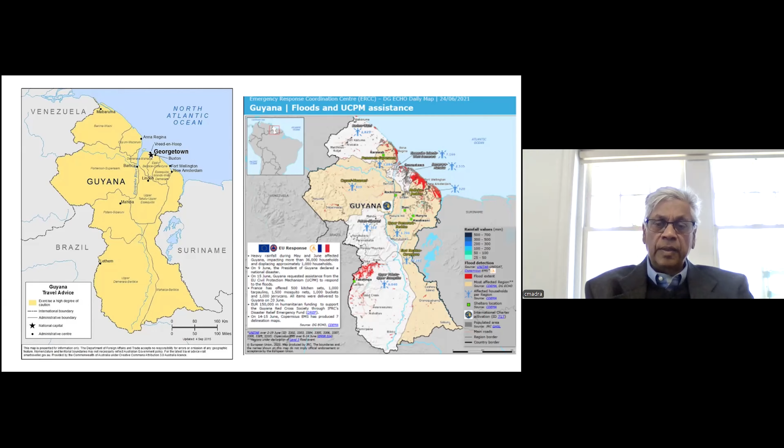So although Guyana is a fairly large landmass, most of the population lies along that coastal area, and this is why the project is also focused in Guyana.

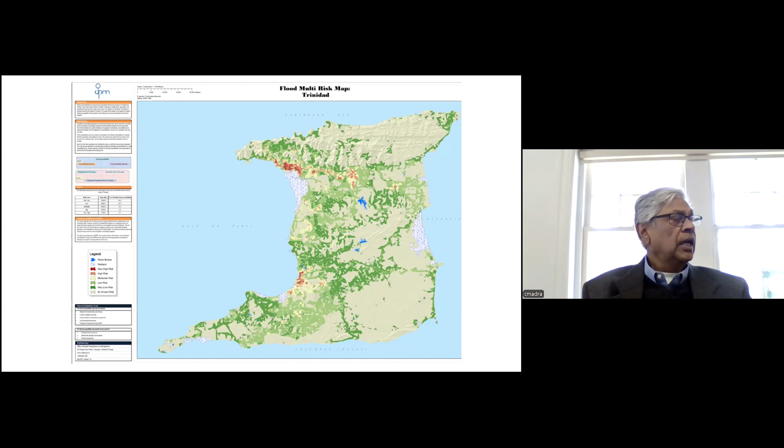So there are many countries - I don't want to go through all of them, but there are something like 12, 13 countries in the Caribbean region affected by flooding in one way or another. The impacts of sea level rise as a result of climate change have exacerbated the problems of flooding.

That's why it's not uncommon to see flooding in the city of Georgetown, capital of Guyana, in the commercial districts and large residential areas, which disrupts economic activity, disrupts schooling, and also affects hospitals and markets, causing food insecurity, water safety problems, and waterborne diseases. There are all these outbreaks associated with flooding that make it important to develop techniques and a framework to deal with flood control.

So very briefly, that Caribbean 360-degree report had several findings.

One of the principal findings is that Caribbean countries are not prepared for the new challenges posed by climate change, compounded by the uncertainty of the future of tourism markets and a lack of fiscal space. They've identified that increasing government efficiency would be required to improve investments, management, and infrastructure in emergency situations. We need to empower households and the private sector to increase fiscal space, strengthen skills for resilience, improve access to finance, facilitate access to risk information, and reduce future physical risk as a result of flooding.

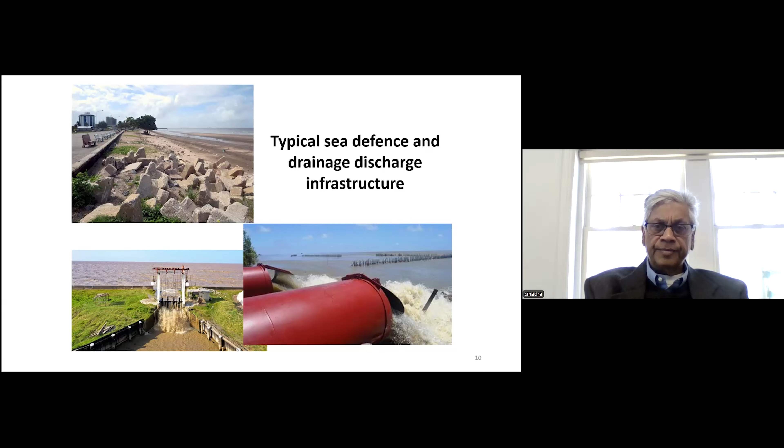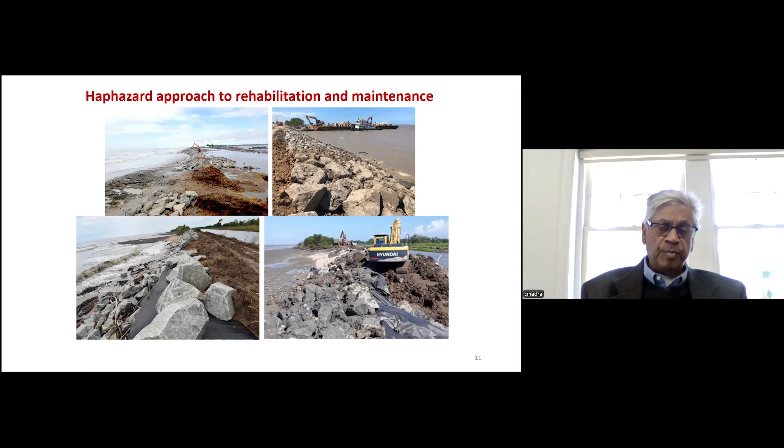Currently there is a haphazard approach to rehabilitation and maintenance. It's very reactive: after floods have occurred, government comes in and starts to repair the retaining walls, do patchwork, build in better berms and boulders for riprap, but it's always reactive. None of this is being done proactively. There's no recognized scheme in place to deal with floods proactively, and this exacerbates the flooding in the country.

So the goal of this project, which was part of the call from the New Frontiers in Research Fund, is that it must be a co-designed, adaptive, co-management solution to the problem. This is not something where international agencies just come in and develop a solution without getting input from the flood-affected communities.

So we developed this framework which shows how we can work with the communities, and I'll talk more about this later. This is some work that Professor Adamowski and Cody, our graduate student, are working on, looking at bringing communities in to help develop some of these strategies.

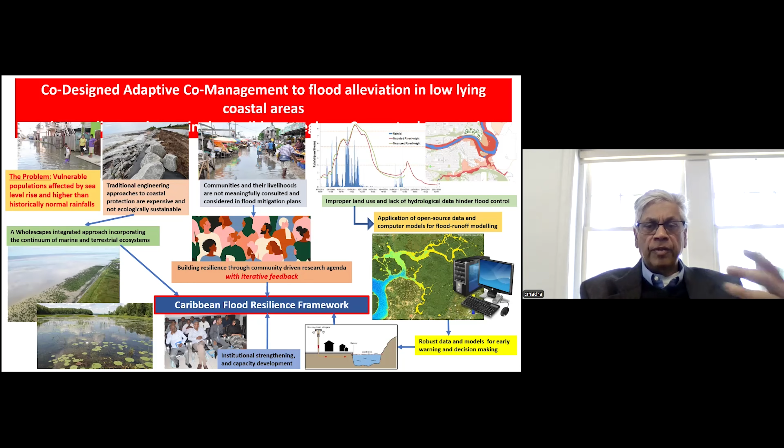And then how we can build capacity through better hydrologic data and flood mapping, using computer models and nature-based solutions, to build resilience through a community-driven research agenda with iterative feedback. So one of the things we're doing is getting feedback from the communities, and we're using that as we go further with our objectives for the project.

So the major deliverables or outputs are this co-developed risk, hazard, and response model to serve affected communities, including the provision of communication products that the communities can take up.

We want to build capacity in the communities, government agencies, and local universities. We also want to improve government policies and institutional frameworks for flood disaster risk management. So these are the three broad objectives, but there are many sub-objectives under these.

Some of the methodologies we are employing are flood forecast modeling, satellite monitoring of rainfall, watershed modeling, using very elaborate models that are suited to very flat, low-lying areas. It's very difficult to model, and I'll talk a bit more about that.

We're looking at coastal dynamics and tidal modeling for the operation of sluices based on predictions, as well as rainfall forecasting, and doing real-time water level measurements and data collection tools as part of our citizen science program. How do we empower citizens in flood-affected communities to help collect data?

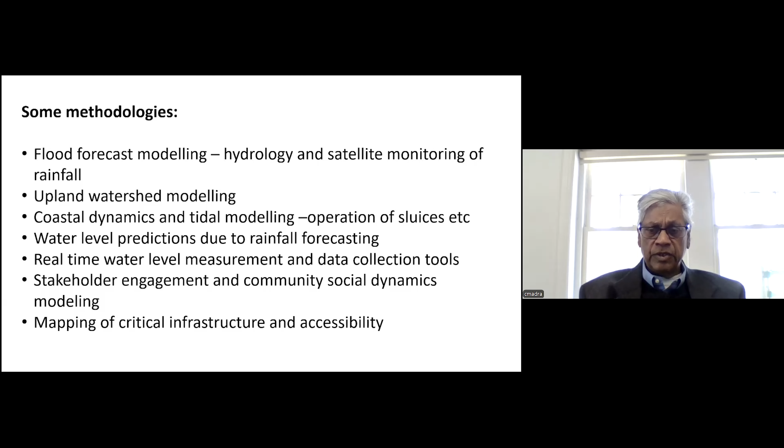We're also looking at mapping critical infrastructure, accessibility, and how to build resilience to prevent that infrastructure from collapsing during times of floods. So we have about 8 tasks overall.

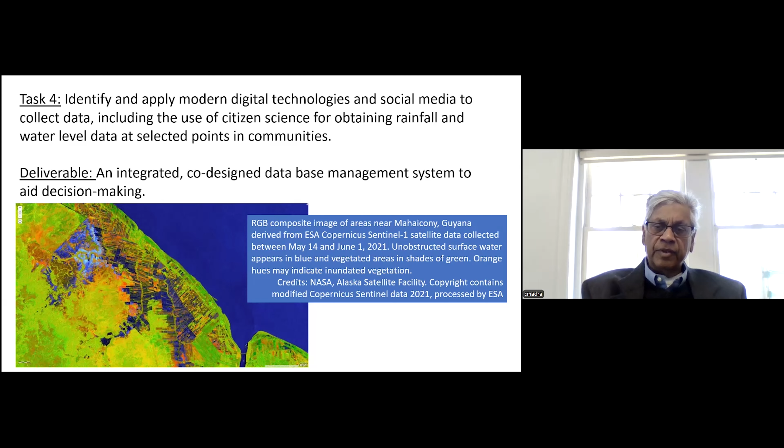A big one I'd like to talk about today is the use of digital technologies that are freely available instead of proprietary information, which is something the New Frontiers Fund would like to see. Could we use satellite data that's currently available to provide inputs into some of our models so we can get better water level data at selected points in communities, helping them make decisions about resilience to floods before the floods occur and disrupt their lives, rather than after the fact, which is what's happening right now.

Obviously we can't study the whole coastal area. We've picked out an area here in Region 4 of the country, which has 10 regions, because it comprises the capital city, Georgetown, and a lot of communities that are heavily populated along the coast.

Interestingly, behind the coastal area, as part of it, there's the East Demerara Water Conservancy. That conservancy was developed over 100 years ago to hold back flood waters from affecting communities along the coast, to provide irrigation water to estates and farmlands toward the coast, and also to provide a supply of drinking water.

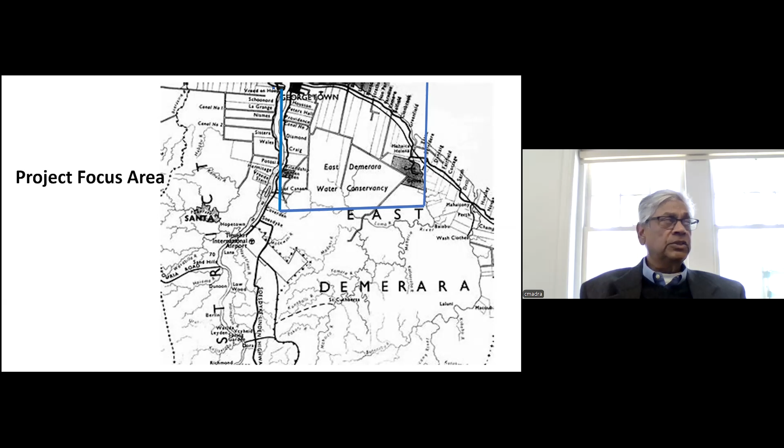We deliberately selected that area because the conservancy would play a very major role in any strategy and framework we develop. There's also quite a bit of data available from the conservancy that could be used for modeling, so it represents quite a nice area to study.

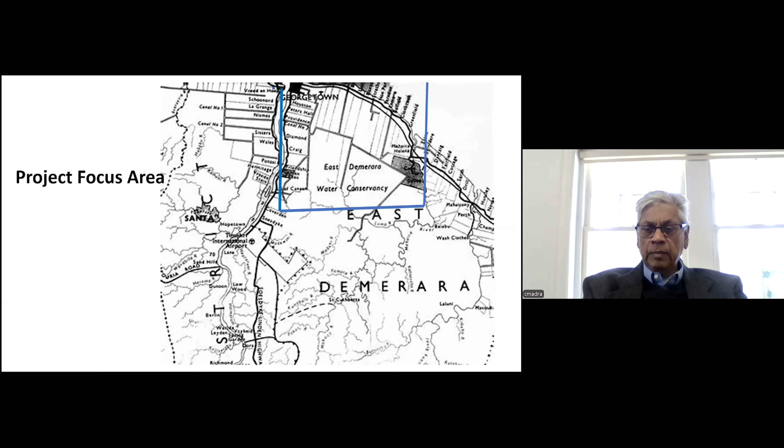Obviously, in this project, whatever information and framework we get for one region, we hope to replicate through other regions, not just in Guyana, but in other countries in the Caribbean region as well.

So the East Demerara Water Conservancy, I've got the statistics here. I won't go into detail, but it has a number of intake structures. As you can see, there are 27 intake structures used to supply water to communities.

There are also some relief structures, 5 major ones that allow for drainage from the conservancy. The picture in the bottom right corner shows one of the major relief structures, the Hope Canal, which drains quite a bit of water from the whole area of Region 4 and this conservancy.

What you'll see here is there's not a lot of water to play with in the conservancy for storage—only about 4 feet really available. So it's a matter of how you regulate that water level in the conservancy so as not to have overtopping of the embankment, which would cause further flooding.

So this is really very critical to the whole effort we're doing on modeling, which I'll elaborate on a bit deeper.

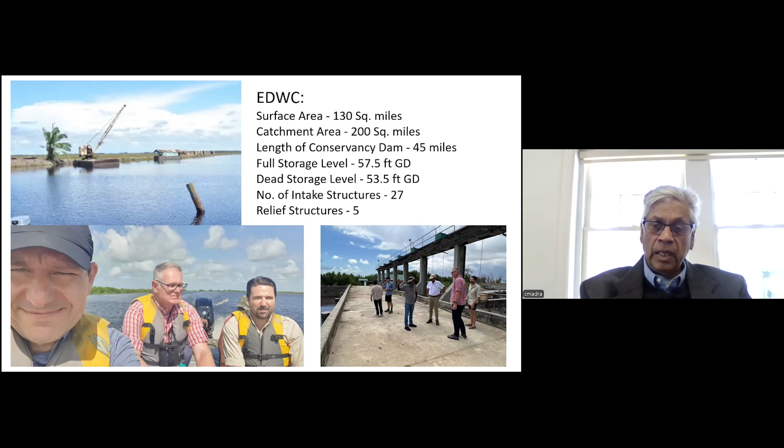So you'll see Professor Adamowski and two of our colleagues from the UK as we did a tour of the conservancy. Let me spend some time first to show what we've been doing here at McGill, and some work that one of my postdocs, Masoud, working with myself and Dr. Adamowski, has been doing looking at some of the rainfall data.

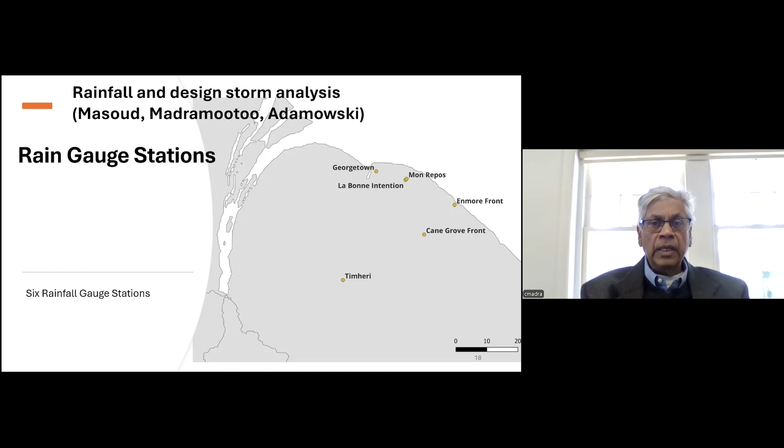There are 6 stations located in Region 4, and we've been putting this data together. Masoud has been doing a terrific job analyzing that data hydrologically and trying to determine what that data tells us.

He's done some statistical tests and shown that the region is statistically homogeneous. That allows us to have a regional frequency analysis model. We've also been looking at other models, the Weibull distribution and the Wakeby distribution, to see if we can get better fits of the data.

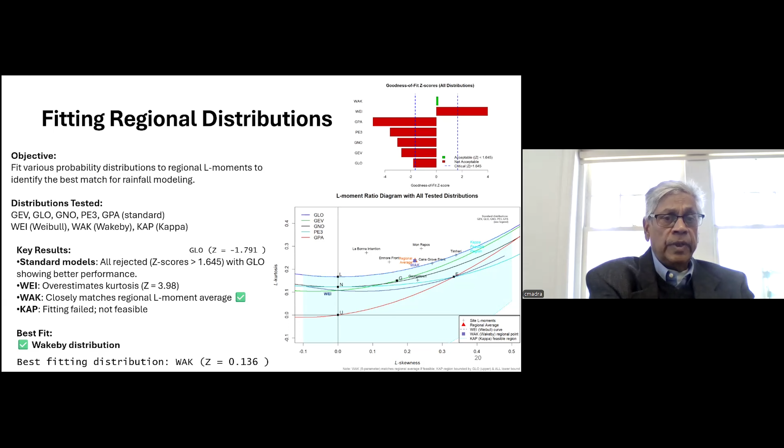The best fit is shown here by the Wakeby distribution. So from all of the analysis of the different models he's looked at, the Wakeby distribution gives the best fit of the rainfall data. This is the first time we want to leave products back in the region and in the countries that have never been looked at before, and this is one example of a very good product we've developed on the statistical fitting of rainfall data.

And then we've gone even further to develop these rainfall intensity frequency curves for each of the rainfall stations, given the number of years of data that we have. There have also been years of missing data, so we've had to take that into consideration.

As you can see, for the 6 stations we've plotted the rainfall depth duration frequency curves with the Wakeby curve, and we now have a good product in terms of determining, for example, the once-in-200-year storm and the once-in-100-year storm. You can see we can expect about 200 millimeters of rainfall from those extreme events.

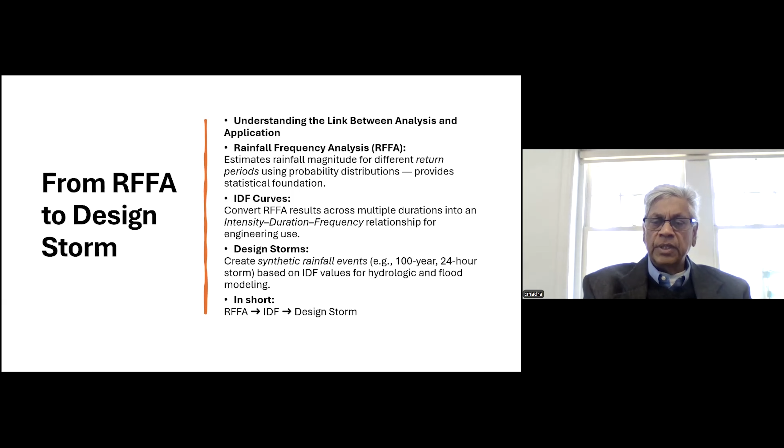So Masoud has gone further with this, because what we wanted to do is take some of this rainfall data and come up with a design storm, a synthetic design storm that we could start to put into our flood modeling. Looking at some of the stations individually, he has presented data on the intensity-duration-frequency curve, very similar for all 6 stations.

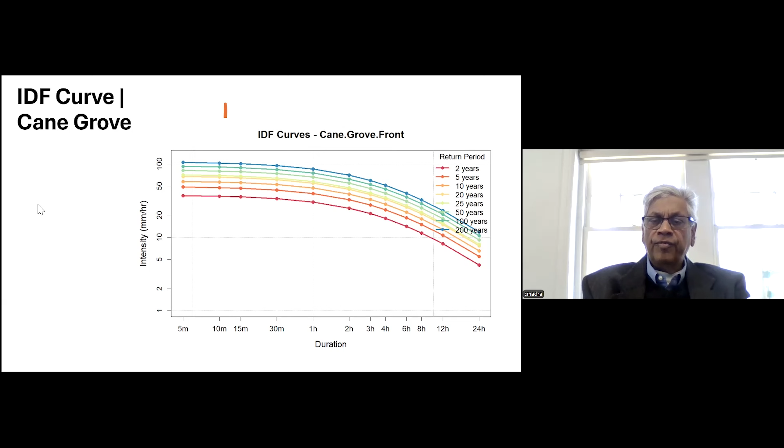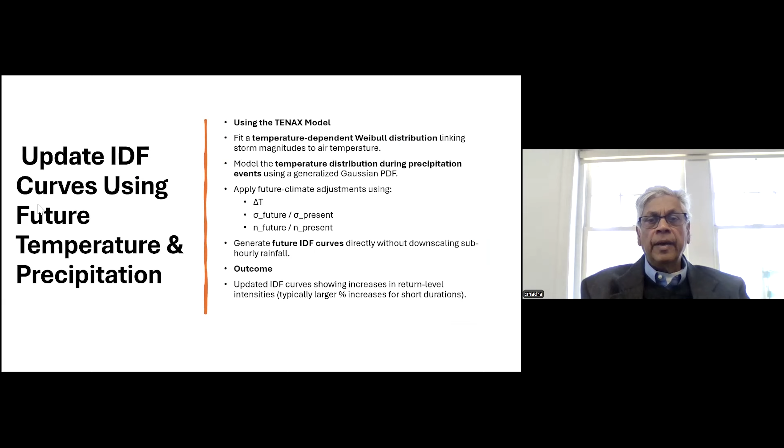So for different duration storms and different return periods, we've been able to build these as products that can be left back in the country for design. And we don't want to design for today - we want to design for the future, taking climate change into account.

Masoud has done some good work looking at how temperature and precipitation changes could affect precipitation going forward. He's come up with information we had never thought about before, and certainly hasn't been considered in the country - these short duration convective storms occurring at temperatures greater than 25 degrees C.

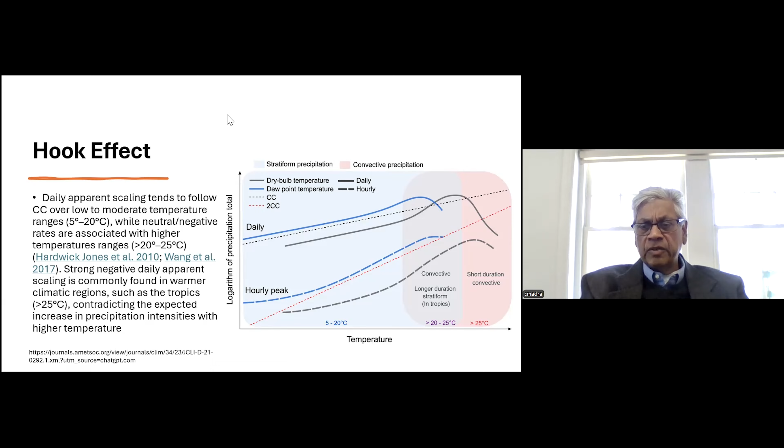He looked into the literature and found this hook effect that others have studied, given that the location we're working in is around the equator - not in the northern or southern regions, but right at the equator. So you have the effects of the intertropical convergence zone that allow this hook effect to be considered in more detail.

This is some early preliminary work - there's still a lot to do, but looking at what a synthetic design storm would look like, you can see here the present and future in terms of total rainfall amounts and then peak amounts. There are some slight increases, but this is very much early work with much more investigation ongoing.

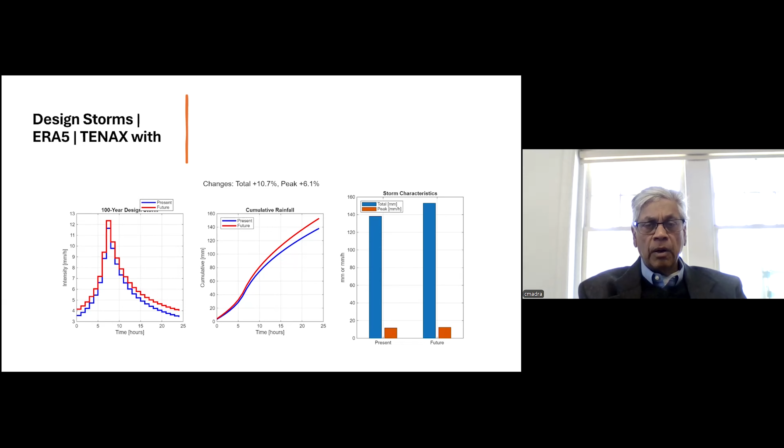But already, based on the work done here, we're coming up with new numerical models on design storms that would bring tremendous inputs to the work we're doing.

Very briefly, I want to talk about some of the work done by our colleagues at the University of Louisiana. They've been working on hydraulic floodplain modeling. As I said, this is a very flat area, with hardly any hydraulic gradient from the upstream catchment area to the coast, and the coast lies about a meter below sea level on average. So this complicates the floodplain modeling.

I'm only going to show you two slides, but my colleagues at Louisiana have done a year and a half of very extensive work trying to get these models to work. They had to build a digital terrain model first, and then, using some of the LiDAR data, develop the mesh or grid size to run the HEC-RAS computer model.

Very important work has been done here. Over the year and a half, they've been looking at all kinds of publicly available data from reports done by previous consultants. And this is one of the problems with projects like these - you have so many data sources, but they don't match up.

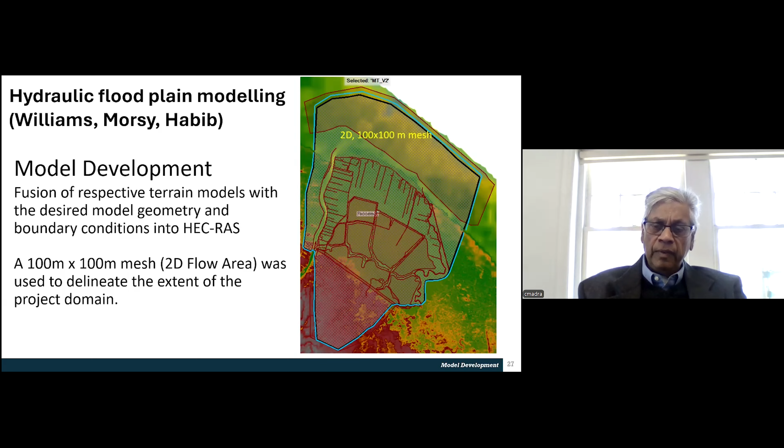Professor Habib and his two colleagues have been spending a lot of time trying to get these models to match, and to be able to run them without showing many of the problems that we would see when you run a model of this nature. You're obviously going to get problems with the water balance adding up.

But some of the very, very preliminary results they have shown here is an initial assessment of the physical boundaries, to ensure that there are no leaks or ingress of water into the coastal lowlands, to be able to get accurate predictions of flow modeling over this very flat coastal plain.

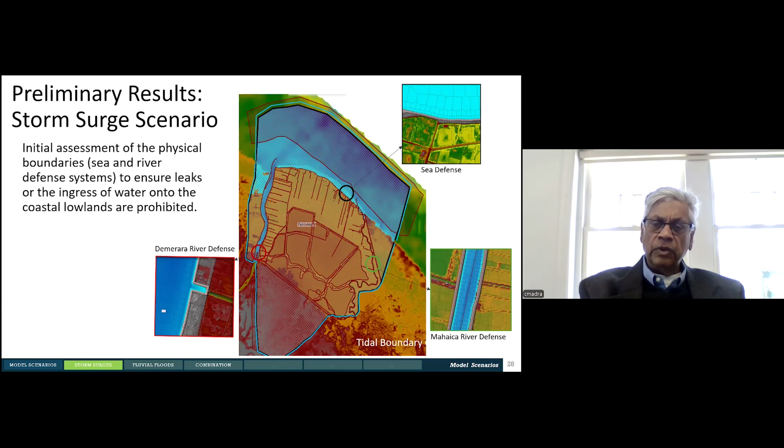So that's currently ongoing. As I said, a tremendous amount of work has been done on this, using both the tidal boundary as one boundary condition, and then the flows from the Demerara River and from the Mahaica River as the other two boundary conditions to be able to get the model to run. So that's very, very elaborate work.

And I'm only able to show two of their slides, but very impressive what they have found so far. And then our colleagues from the UK Centre for Ecology and Hydrology have also been doing some other modeling, grid-to-grid modeling at 1 kilometer resolution over the whole country, and then narrowed it down to our study region here.

And I mention this because it's very important from one standpoint, and that is the question of land use. Since the discovery of oil, it's one of the fastest growing oil economies in the world right now. The oil industry has taken off in such large intensity that a lot of the land use is being converted into industrial areas, housing areas. And so there's less percolation of runoff water and much more now contributing to runoff.

And one of the things that we hope to get out of this grid-to-grid modeling is what would happen if you change land use and you put more areas under things like wetlands, detention ponds, and storage reservoirs, and so on, to trap some of the runoff from the area. So that's where this work is leading to.

Again, quite a bit of modeling has gone on there. When you look at one slide, it's very difficult to see how many months of work have gone on here to get this to all work out. And of course, the data sources are also critical as well, trying to match them up.

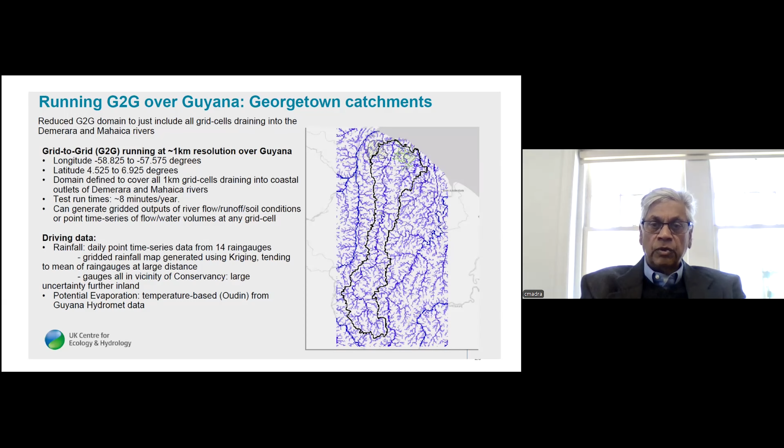So another area that myself and Dr. Adamowski have been working on with one of our PhD students, Cody Danaher, is on the social side of things. From the standpoint of the New Frontiers Research Fund, these projects must be multidisciplinary. It's more than just the science and the engineering. It's how do you bring the social sciences, the humanities into account, especially as you're looking at bringing communities in to develop this flood risk framework.

So Cody has been out to the region as he starts to build his systems dynamics model. And this is some of the findings that he has come up with. He visited two of our study regions, areas along the coast. And the two areas that he has studied, Cane Grove and Caledonia, you'll see the differences in land use, the impacts of flooding, and the facts that we need to understand much better some of these perceived flood characteristics.

So that's what he's working on, looking more at this. And he will be going back to collect more data. As he points out, many government agencies are perceived as having a role, but the communication and coordination barriers between these agencies leaves a lot to be desired for the communities in the two regions.

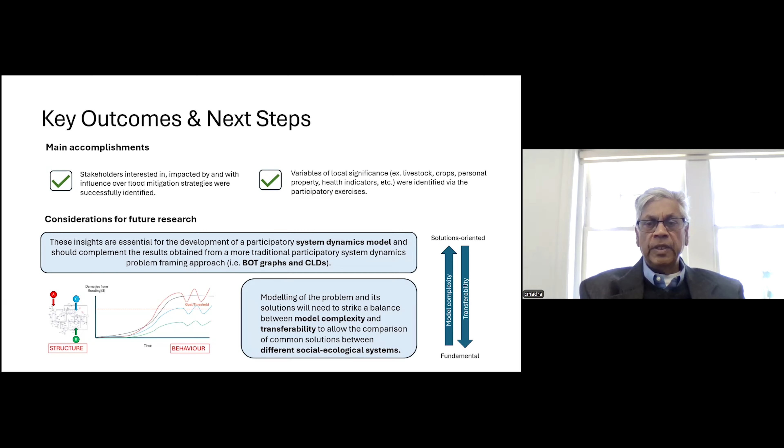So his next step is to build the systems dynamic model. They've already collected quite a bit of data from the mapping exercise they've done, but now as they build a systems dynamic model, how can they look at incorporating different social ecological elements into the framework?

The other area that is being studied is in Trinidad by our colleagues at the University of the West Indies, who are collaborators. And they have selected a basin in southern Trinidad, the South Oropouche River Basin, where there's quite a bit of instrumentation in the basin, a lot of flooding that takes place, primarily riverine flooding, some coastal flooding.

But they have been looking at some of that data, and the plan is to use it for decision making, to do some of the similar hydrologic and hydraulic modeling that we've been doing, build capacity, and of course, build flood resilience. So, based on everything that we have talked about so far, one wonders, and this is something the New Frontiers Research Fund is trying to promote as well, is nature-based solutions.

And so how can we incorporate things like mangroves, which are natural to the area, seagrass, reed beds that are also natural, and different reefs? How do we include all of that in trying to strengthen the resilience framework and build those structures in?

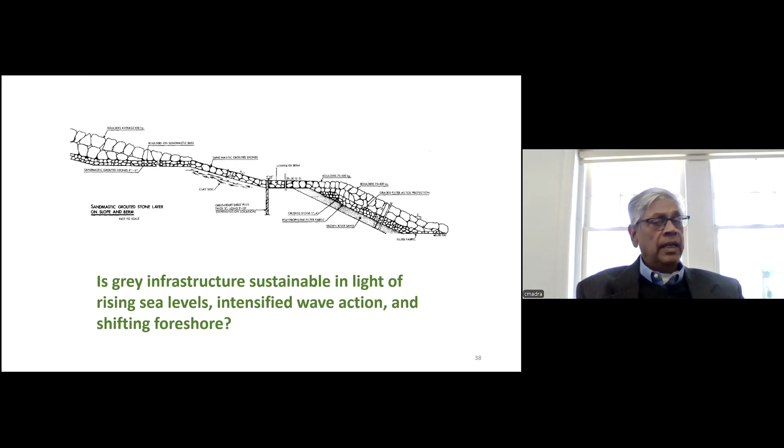So how long can we continue to do grey infrastructure and keep it sustainable in light of rising sea levels and intensified wave action? And then there's a large shift in foreshore because of the flows that come from the Amazon, which flow northward up along the Guyana coast and cause this coastline to shift. So there are huge bathymetric and engineering challenges to keep this managed and properly maintained.

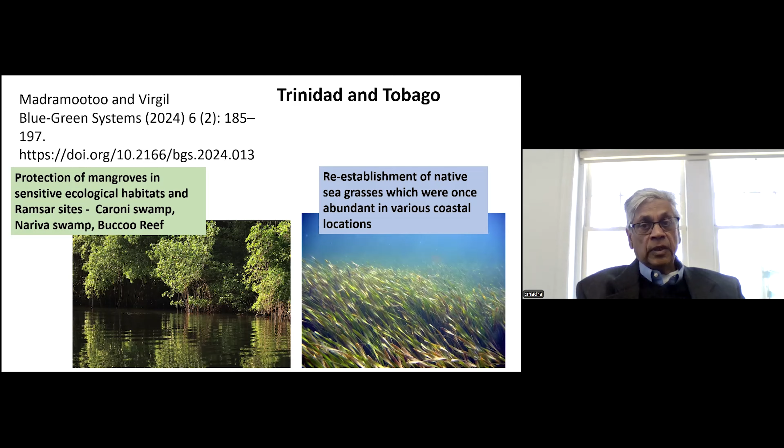Myself and a former graduate student from Trinidad and Tobago, Christian Virgil, we looked at this, particularly in the case of Trinidad, at how we can reestablish these native seagrasses. We published a paper in Blue-Green Systems on this, looking at the rehabilitation and the effects it could have on trying to reduce flood damage.

So these are some of the main highlights I wanted to present today. I know, Carissa, we're probably getting close to time, and we want to leave some time for questions and discussion, so I'd be happy to answer any question. It's about 1.5 years of work that has gone into this project, so I could only show you glimpses and snapshots, not every detail.

What I haven't shown here, but maybe Cody could talk about, is that our colleagues from Imperial College are probably in the field right now collecting data in Guyana with the stakeholder communities as well. Imperial College has quite a significant component here, and one of our colleagues in hydrology is working with us on setting up sensor networks with low-cost sensors to develop a citizen science program, which I haven't had time to touch on today, but I'd be happy to discuss.

So I'll stop here, Carissa, and hand it over to you.

Can you give me the question again? How should financing tools be designed to help support these projects? Well, it's a very good question.